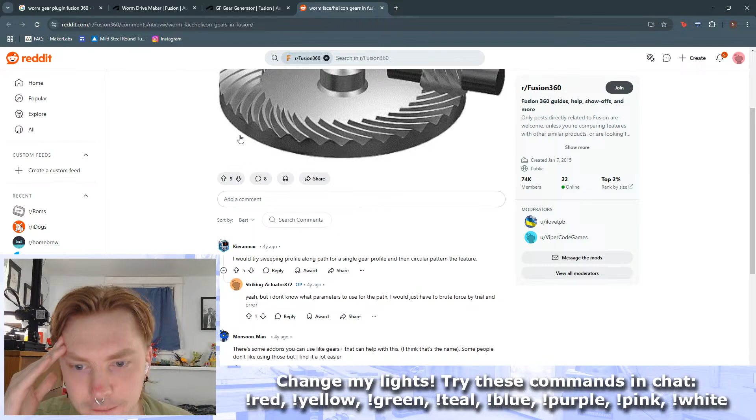So I think we are just gonna take a look. Worm gear plugin Fusion 360. So we've got Worm Drive Maker, $20 US. GF gear generator. Anything else? There's some add-ons you can use, like Gears Plus, that help with this. One of these might have it if you're looking for plugins or add-ons.

None of these can produce the face gear. I don't need a face gear, so that's fine. This might help. Let's see, GF gear generator. It's a minimalistic gear design application. Designs are made following the metric module DIN standard series. It's made for everyone. It includes 11 types of gears, 7 standard, 2 non-standard, and 2 experimental for every project you might want to implement them in. Spur gear, simple double helical, 90-degree bevel gears, gear rack, worm gear drive.

I guess this is what I want. So I think I don't even have to pay for a plugin. I was ready to pay. Money's not an issue, they call me Mr. Moneybags on the streets, but I'm not going to say no to a free plugin. I'm certainly not going to say no to a free one.

Is this? Let's see, okay, so this one, it's got 47 5-star reviews, which is pretty good. And those look pretty good. Let's see, let's just look at the other ones. All right, so helical gear generator.

Sorry, I'm getting a text. Getting a text from a friend of the channel. Let's see. Sorry, just reading some texts.

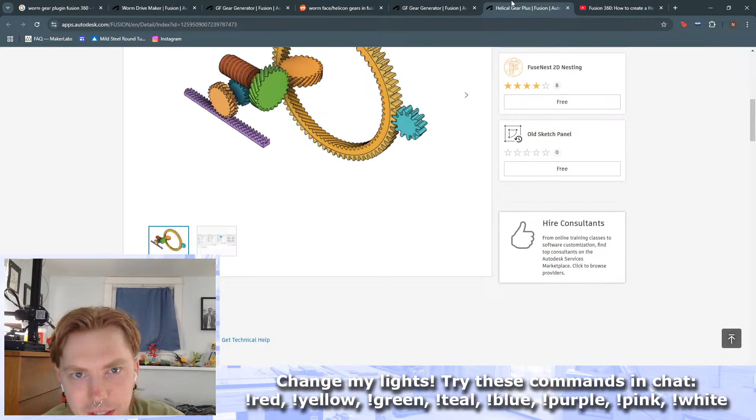This is not what I really want, I don't think. Helical gear plus. I think so. GF gear generator is looking pretty good.

Do I have audio? Wait, do I not have audio? Oh, I had audio a minute ago, no? Where did my audio go? One second. We are having technical difficulties. Give us just a second, chat. Why do I not have audio? Disconnect. Oh okay, and can I connect them back in? Will I hear anything? Hello, hello.

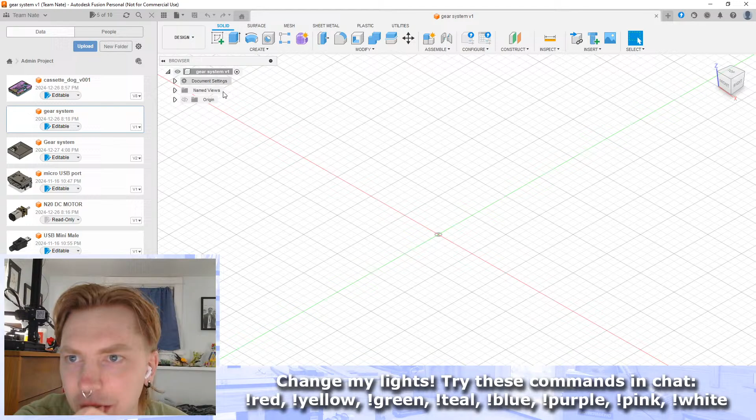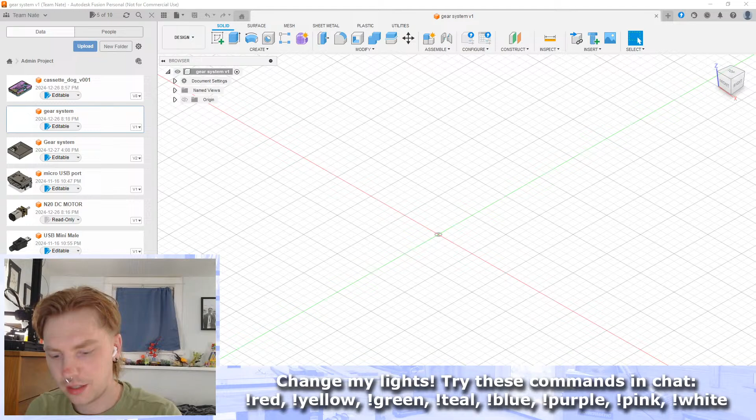Let's open gear system. And how do I use the plugin that I just installed? Extensions? No. How to use Fusion 360 add-ons.

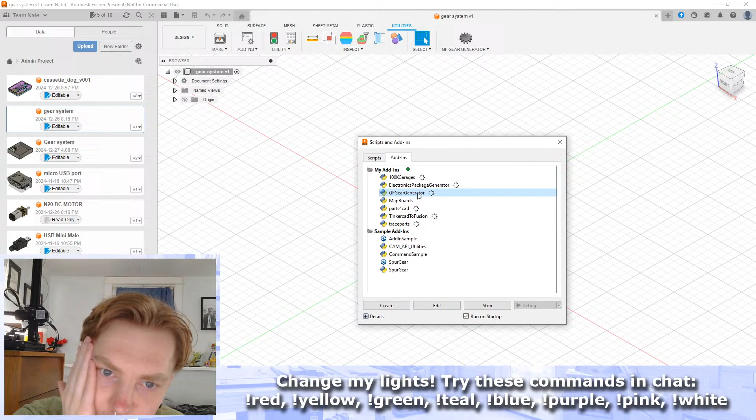We ran the installer. Once installed, the add-on or script appears in the scripts and add-ins dialog box, which is utilities, add-ins, scripts and add-ins. So, add-ins, GF gear generator. Okay. And how do I... Oh okay, right here.

We've got worm gear drive, helical. Yeah, helical sounds right. Helical sounds right. Sure, that. This helical gear.

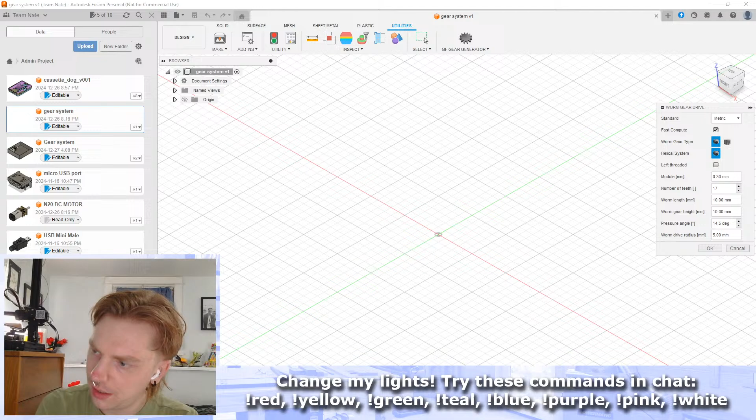All right, so to get this worm gear to mesh with the spur gears that I want to create, the module of both has to be the same. So this needs to be the same between this worm gear and the spur gear. The pressure angle needs to match also. I see. And I guess that's it.

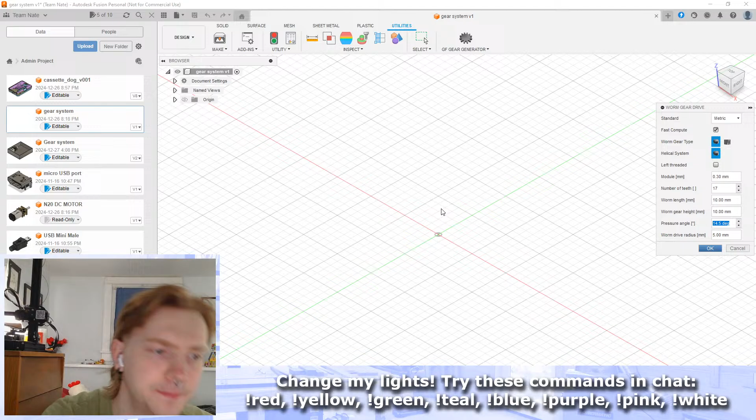Okay, let's just create this default worm gear. Ah, I made two. Oh, it generated that automatically. Wait. Huh, that's cool.

I see, I see. Let's match the teeth. Let's try and match some of this to the stuff that's on iDog, and let's bring in the N20 DC motor as well.

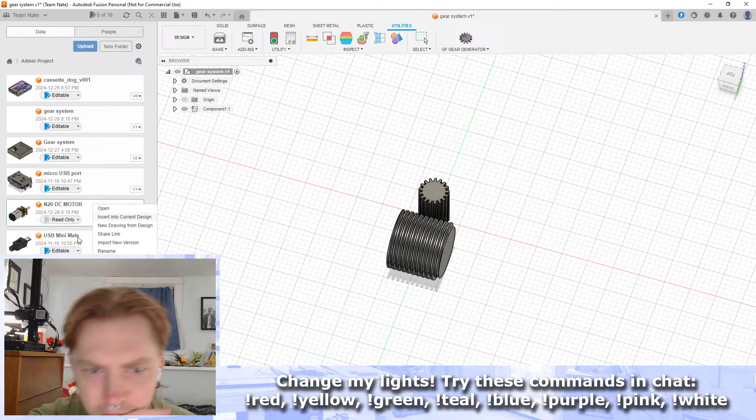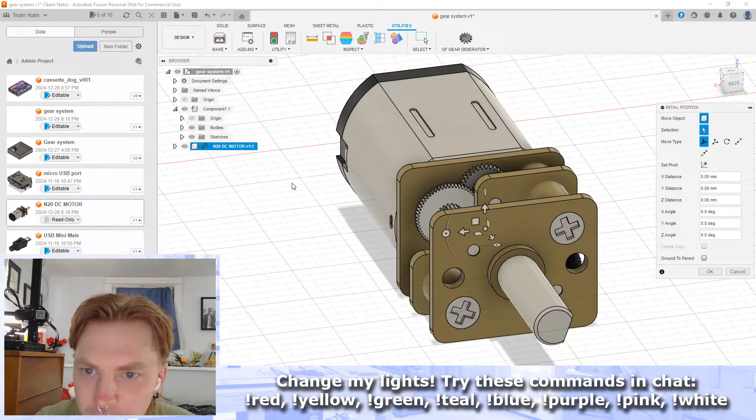Where did the DC motor go? Is it here? Where did that go? Okay, so we got the N20 motor, and then we want the worm drive to attach to the end of the N20 motor.

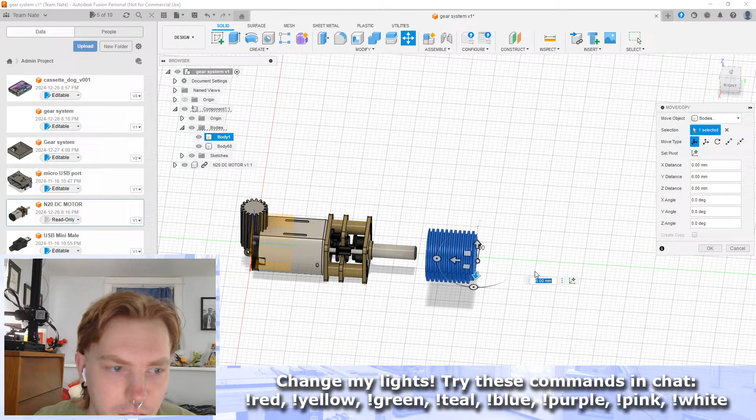So bodies, we want... Oh my, okay, so let's take this. We'll move it like so, like so. So I think we'll make it a little bit longer and a little bit less wide if we can.

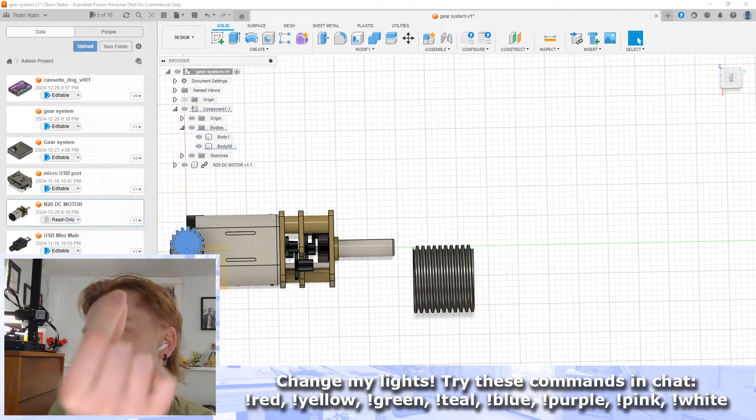And then as far as how many teeth are on the spur, let's match that. Yeah, I might as well match that to how many teeth are on the one on iDog. That is okay. I've already torn apart the iDog, so I have the gears and stuff I'm trying to mimic. I'm not trying to recreate this one-to-one, but I might as well try to make it at least similar.

So let's see, how many teeth does this thing have? 1, 2, 3, 4, 5, 6, 7, 8, 9, 10, 11, 12. Let's say like 24 teeth.

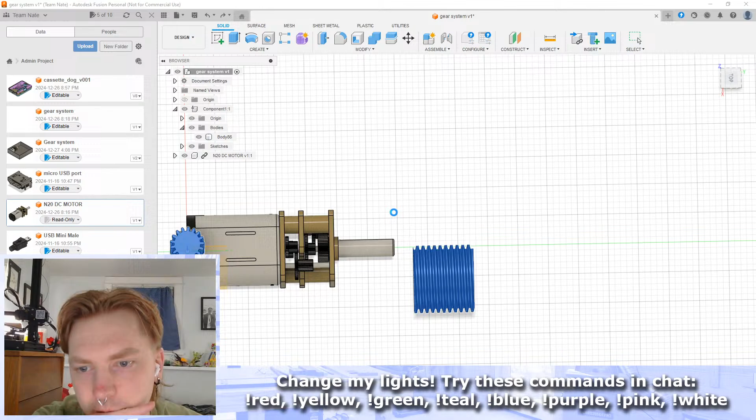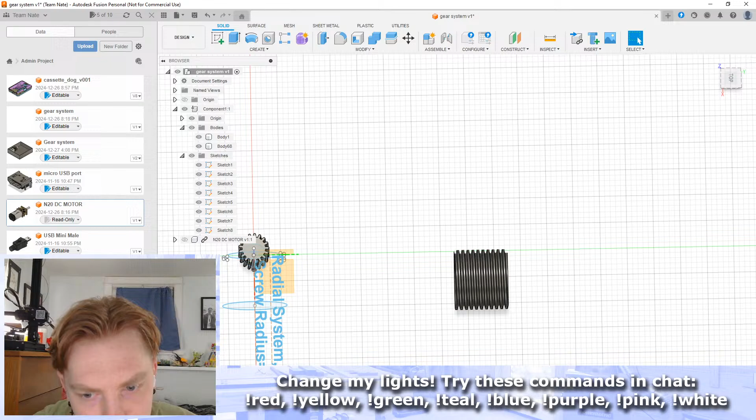Oh, let's undo that. Can I remove both of these? No, that just makes it freak out. Let's... Can we just delete all of that? Okay, let us make another one. I guess we're just going to keep trial and erroring it until it looks about right.

Worm gear drive. So the worm length, we said we wanted to be a little bit longer, let's say 15 millimeters. And we said we wanted it to be a little less wide, so let's say 7.5 millimeters. We want the teeth, let's say 24 teeth.

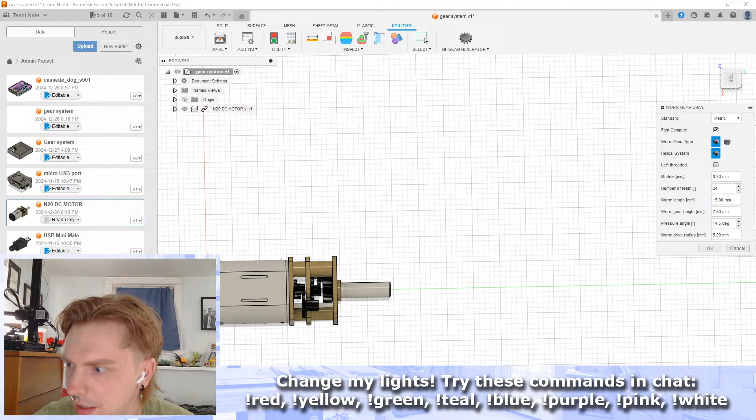Module. What is the module of a gear? We all learned something today. What is the module of a gear? Defines the size of the teeth and relates the pitch diameter of the gear to its number of teeth. I see, so that's going to decide basically the diameter. It's like the relationship between the diameter and the number of teeth.

Let's just say that's... Wait, what's the difference between worm gear height and worm drive radius? I don't know, let's just attempt this and see what we get.

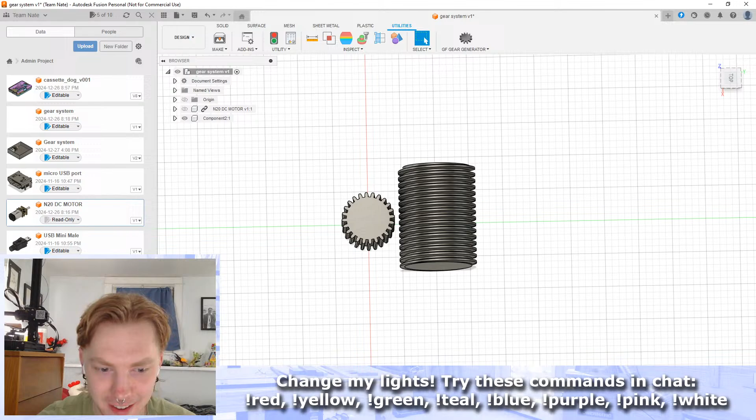We're doing a lot of this based on vibes, chat. This is not a hard and fast science that we're doing today. But I think I want the worm drive to have less, because this is getting 3D printed, and I don't want to have all of these helixes. I want fewer of these helixes. I'm trying to think of what parameter is affecting how many of these spirals we get. I want to just go wow wow wow instead of wow wow wow wow wow wow wow wow wow, you know.

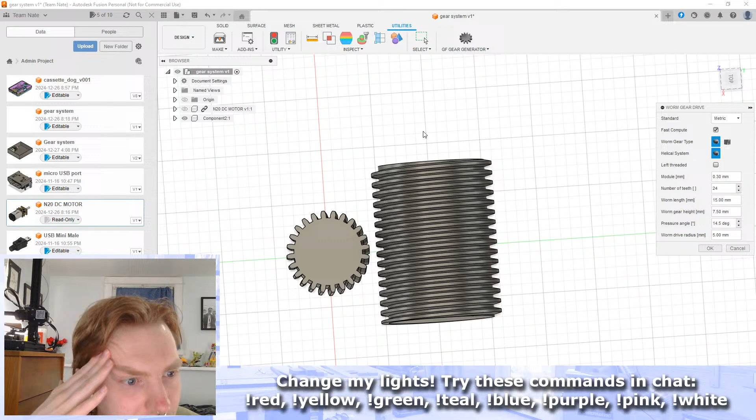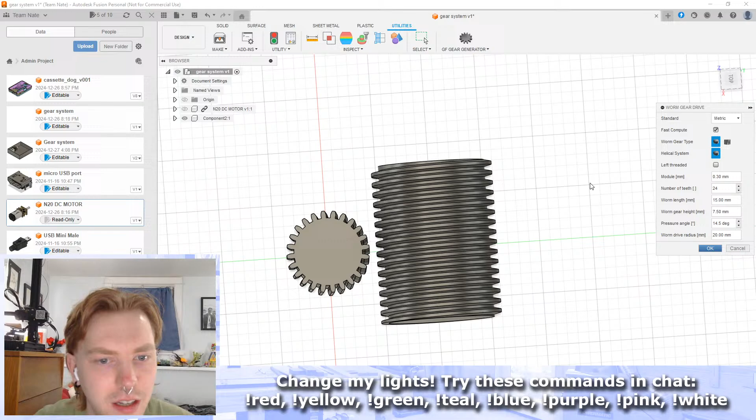Let's try. What if... yeah, we're just going to trial and error this. Worm drive radius, instead of 5, let's make it like 20. Oh, all right, well I guess that answers that.

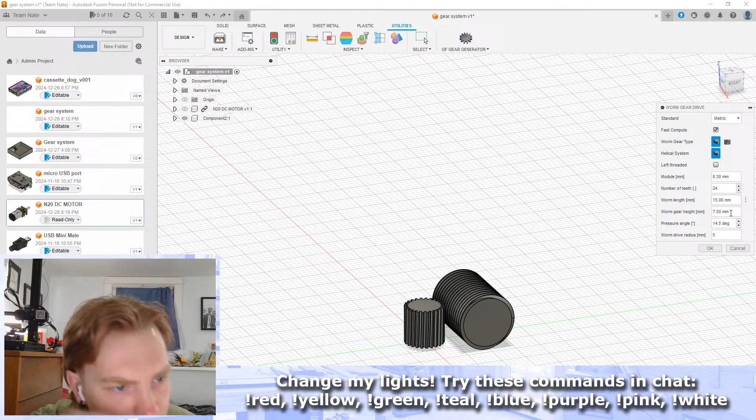Let's change that back to 5. Then what does worm gear height do? What if I change this to 75? So that changes this. Okay, so that's fine. Let's change this back to 7.5.

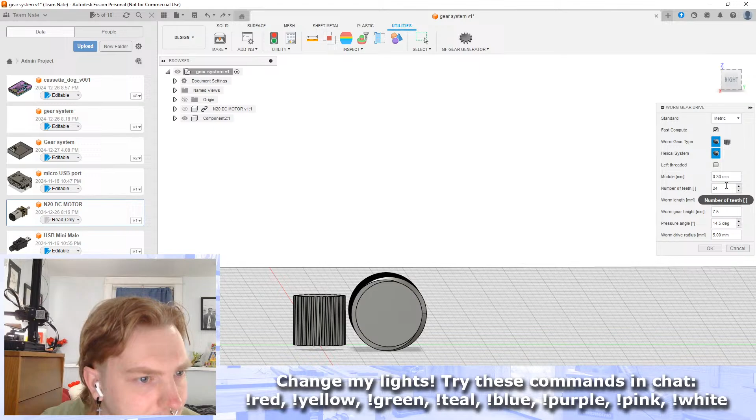Module. Let's change module to like 0. Let's triple it and see what that does. That, okay, that's closer. Yeah, because I wanted this worm gear to have way less spirals. So we're getting closer to what I want, for sure.

Let's delete that. Yeah, so I wanted this spiral. This seems good here, but now this gear is a little bit bigger than I'd like, and I understand it has to be... how does this work? I like this, but I dislike how big this is.

Worm gear drive, maybe pressure angle has something to do with it. What if... well, does that make sense? I know that reducing the number of teeth on the spur gear will make it smaller, obviously, but somehow the one in the iDog has a relatively small number of, well, I think it has a little more.

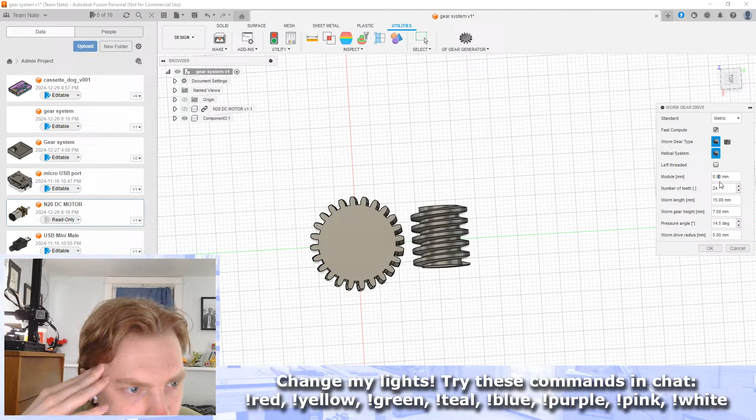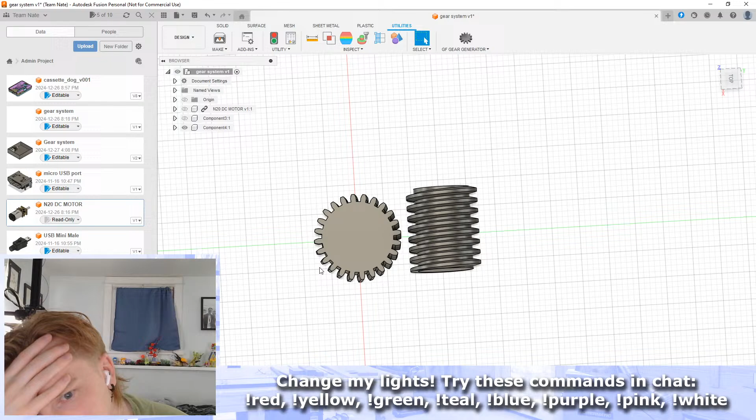We can change the module to be, let's say 0, because we tripled it last time. What about 0.6? Okay, that's pretty close to good. Maybe let's change it a little more.

Worm gear drive, let's say 0.75, and number of teeth, reduce it down to like 20. I think that'll be good, at least for a test. It's something I can't get too worked up about, I guess, getting the gears right. There's no exact science, this is just vibes. I mean, there probably is an exact science, I just don't know it. I think this will work for what we want today.

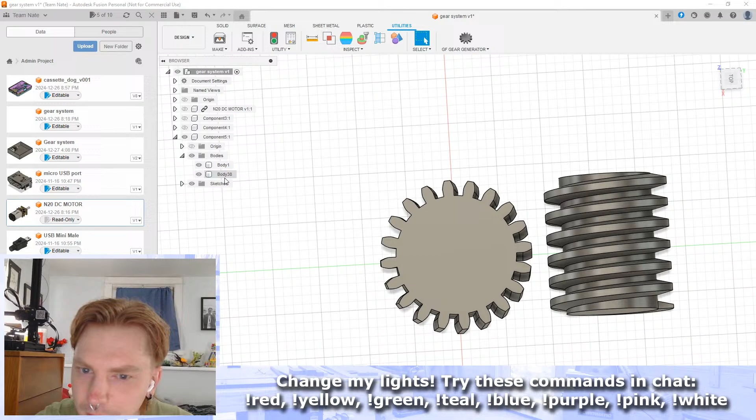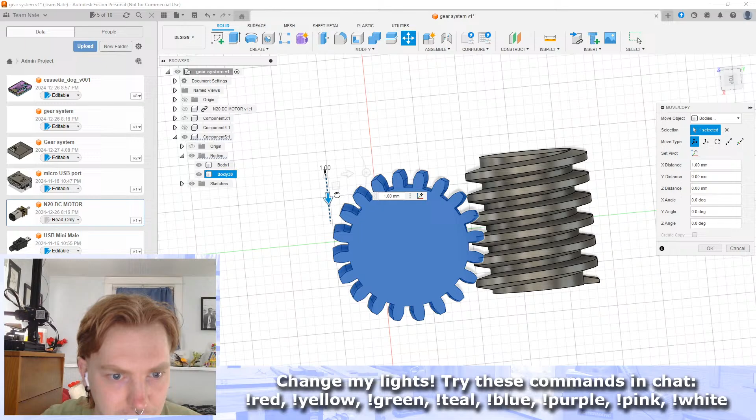I think we can just say that's good, we can call that good. And then if I were to move this gear, I think this gear generator is designed to mesh this spur gear to this worm gear, even if someone really stupid is doing it. So I think that's perfect, pretty perfectly.

There is definitely a precise calculation to place these so that it doesn't act crazy, but I think we can just do some vibes. Some little vibes never hurt anybody. I want to move that, 0.25 millimeters?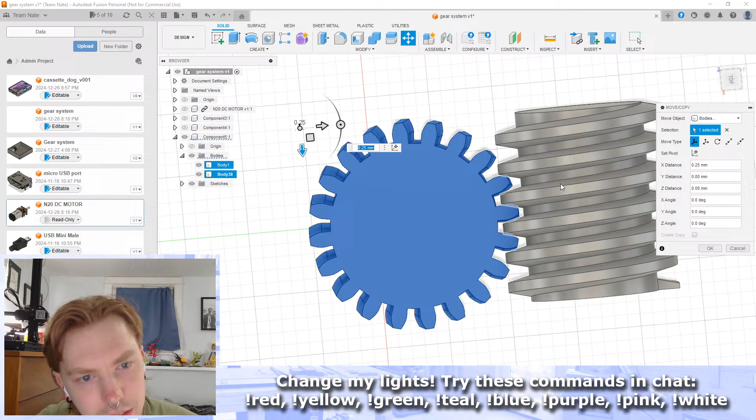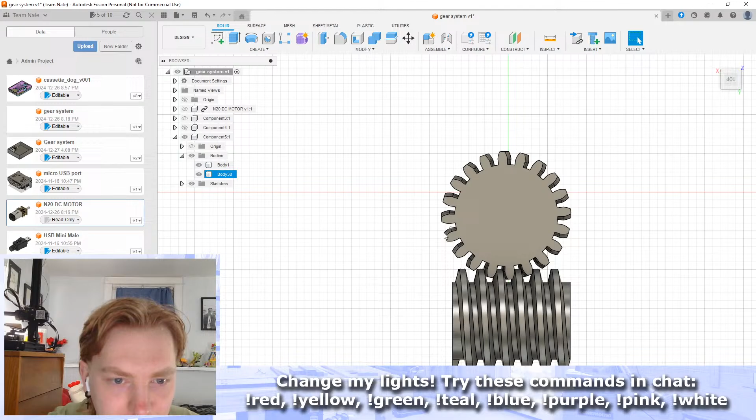Does that look about right, chat? That looks good. Yeah, you know what, we can't let perfect be the enemy of good. I think this is good for today. Someone who is actually smart with CAD can tell me how wrong I'm doing things on another day. But that looks good, that's something.

That is something. I guess, can I just take... did I already delete? No, we'll delete. Don't need this. Delete, don't need this. Okay.

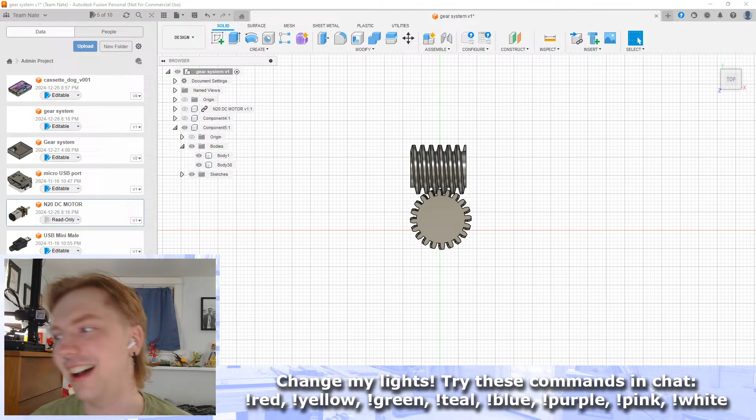See, a problem with the stream from yesterday, a very successful stream by the way, it went pretty well. I usually don't have OBS open to actually look at what I'm doing because I get distracted by the little picture of me on the side. But a lot of my footage from yesterday just looked like this, just a forehead or just an ear. I'm very bad at staying visible on camera. I do a lot of this, which is okay, but not ideal, dare I say.

Let's take both of these and rotate it. Let's rotate this whole thing. Yeah, that's what I would like to do. And then, yeah, sure, sure.

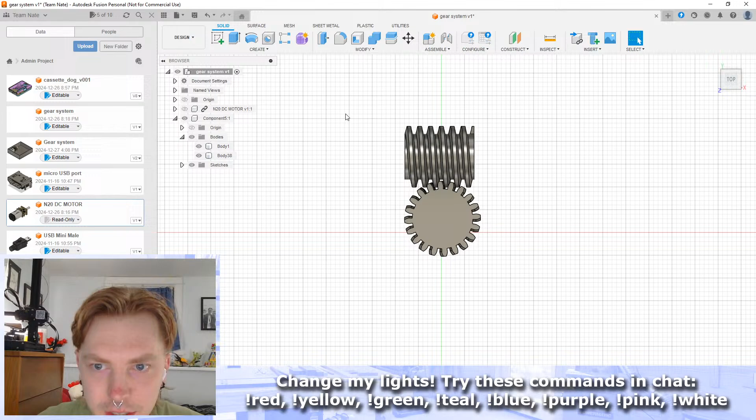Wait, what happened here? What happened here? Sorry, I'm gonna undo some things. I want to delete this. Delete both group and contents. Yes, okay. And then I want to...

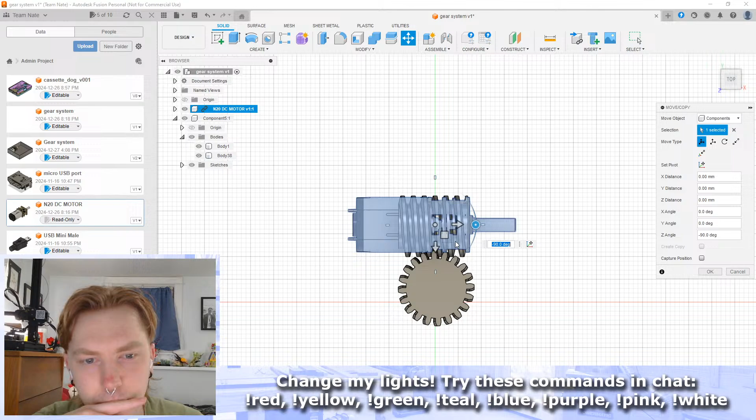Let's take the N20 motor, move it, well, we'll just rotate it 90, and then we can just move it like that. That should be good.

Okay, move the worm gear system, move it, rotate this 180, move this like so. And I want, let's not attach it to the motor just yet. Can I find the center of the worm gear? That's pretty important.

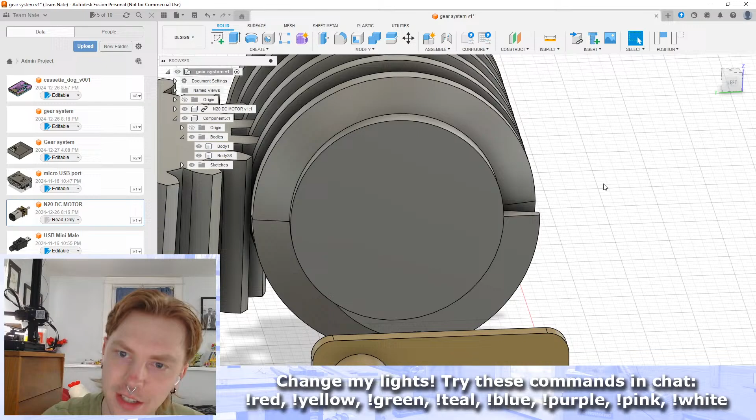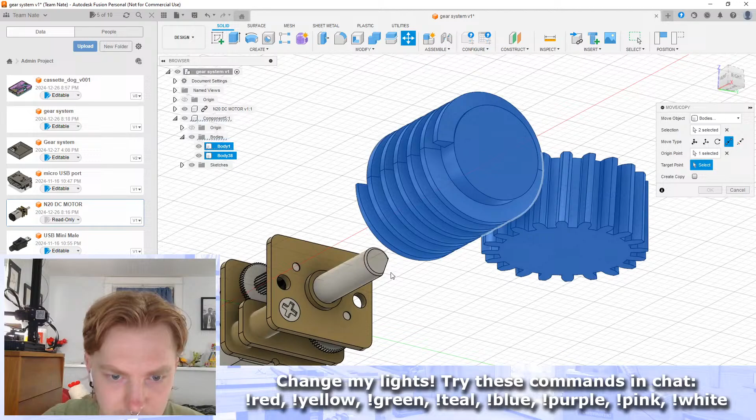Is it smart enough? Can I select both of these, click move? I want to do point to point. That looks like a center. And target point, we'll do the center of this. Some component positions have changed. Do you want to capture the current position of moved components? Revert? Oh, nope, that's not what I wanted.

Let's try that again, let us try that one more time. We're going to select both of these, we're going to move, we want point to point. Origin point, we want the center of the worm drive. Target point, we want the center of the output shaft, well which one? Which one? Which one's the center? Oh no, wait what? Oh.

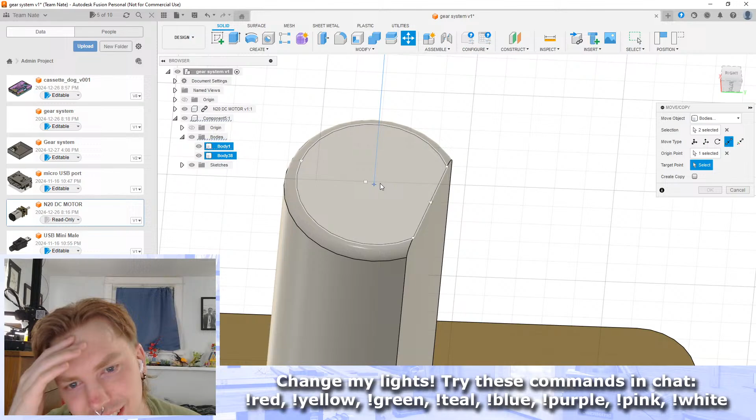Chat. Oh no, this is... I feel like I'm in goddamn Squid Game right now. I don't know which one is the center. Shall we just take a chance? Just take a risk?

We're asking ChatGPT for sure. We're asking ChatGPT.

Is the little cross the center of the output shaft, or is it the square? The cross typically represents the center point of a feature like a shaft. The square, on the other hand, often represents a vertex or a specific point on the sketch.

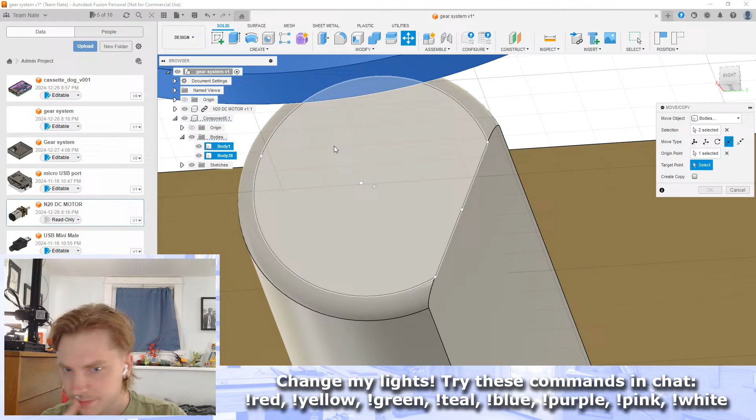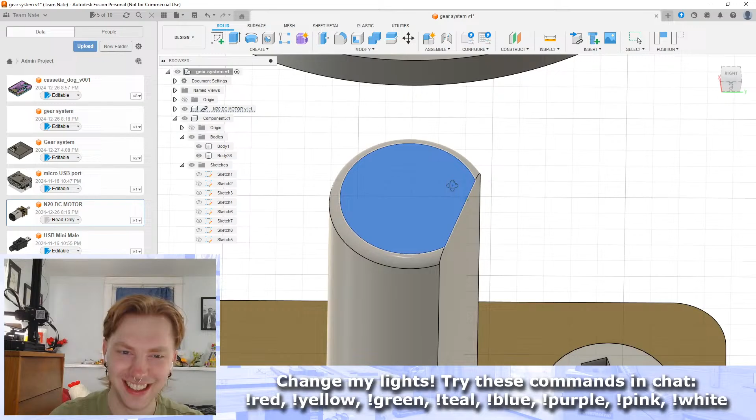Wait, I'm gonna hit cancel for a second. I'm sweating. What do I... I guess I can probably wait, chat. Okay, I know what to do. I was not acting very smart.

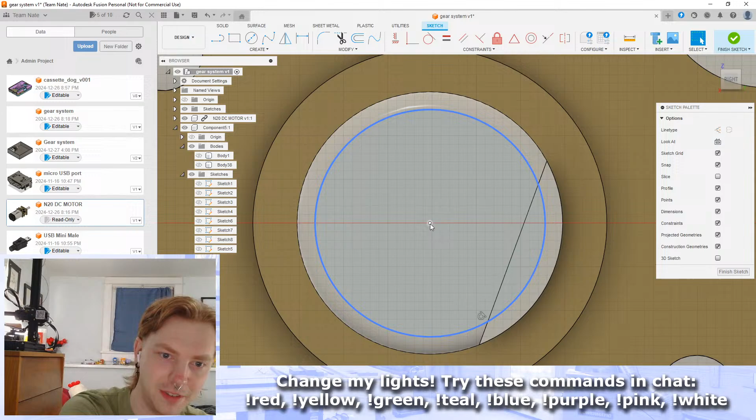I'm gonna create a sketch here, and we're gonna find capture position. If I make just a circle... no, here's what we're gonna do. I'm gonna create a 2-point circle, and go like that. Okay. And that's the center point, that's the center point of the circle. I'm gonna just create some lines going off it.

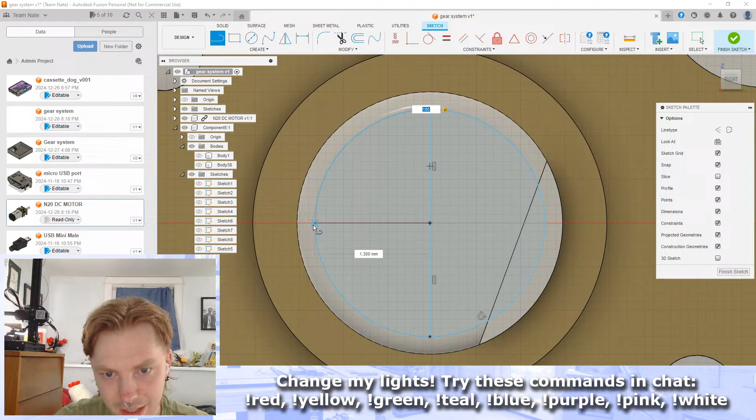90. I want to be damn certain that I am putting the worm gear in the center of the shaft, or else nothing will really work, and that would be very sad. I say this a lot: I am not a CAD master. I wouldn't even call myself CAD intermediate, I am a CAD baby. But I think I'm just able to... I'm an expert at trial and error, is what I will say.

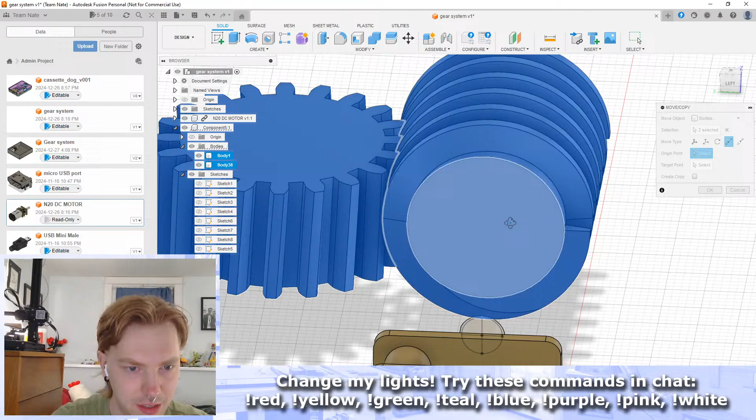I'm gonna move point to point. I don't even know, I'm not even confident if this is the... oh, you know what, we are gonna do chat. I'm gonna do the same thing on this. It's really important that the center of the output shaft of the motor is going into the center of the worm gear, so we're gonna spend some time to make sure that's the case.

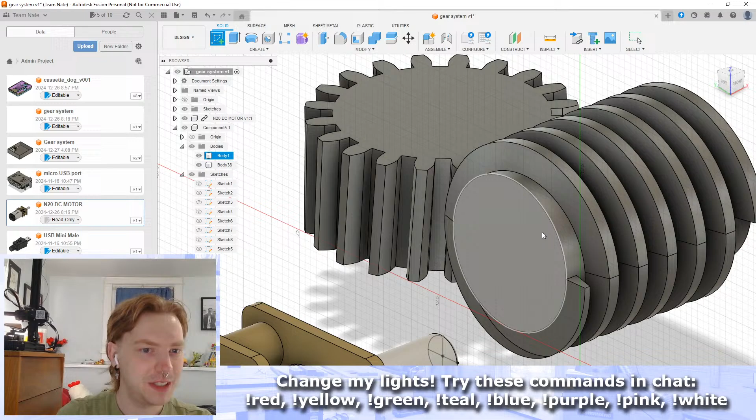This is such an easy task, but it's like it's Herculean, just because I am a little bit stupid. But we're gonna make this happen. We're gonna get 2-point circle, attach the top. That's good.

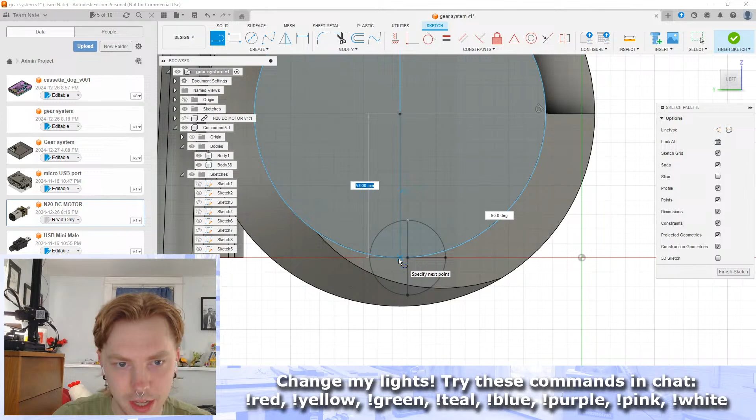90. Yeah, on my life, the center of the shaft is going into the center of the worm, on my life, if it's the last thing I do on this mortal coil. Okay. Yeah, finish sketch. Okay.

Chat. If this doesn't work, I don't know what I'm gonna do. I'm just gonna start breaking things. That's not true.

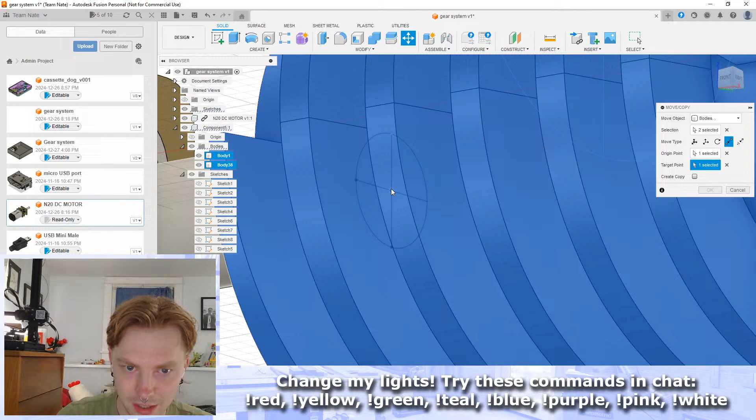Center, yes, 2, center. Oh yeah, okay, that has to be good, that has to be good. We are gonna click, okay.

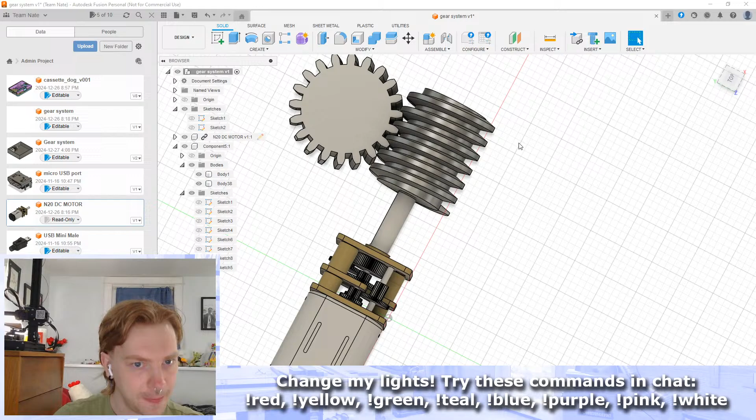Where are these sketches hiding, by the way? Why do I have multiple sketches folders? We're not going to worry about that. Then what we are going to do, I'm going to project. I want to project the output shaft of the motor onto the surface of the worm gear, so that I can make a hole in the worm gear so that I can fit on the shaft. That is the plan.

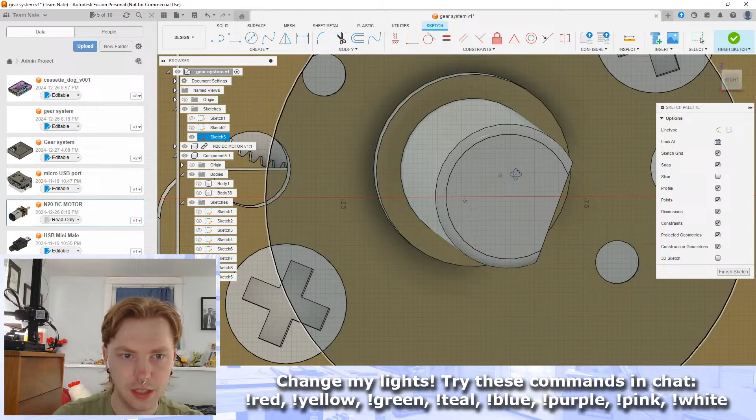So I guess I want to create a sketch on this surface. I'm going to hide these bodies for now. I want to project, create, project, include project. I'm going to project.

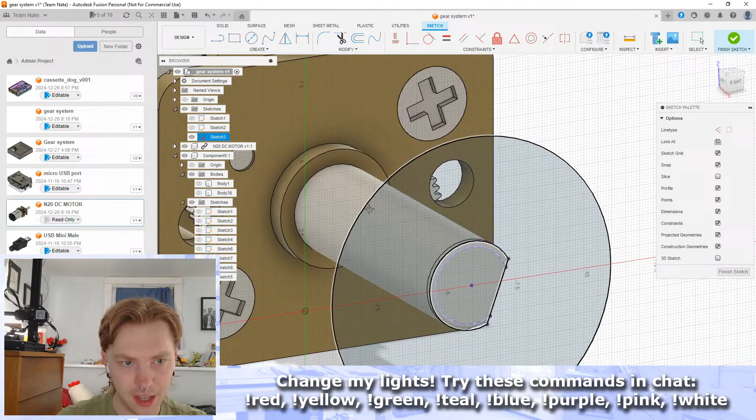Yes, okay, then I think we can just finish that sketch. And I will make the gears visible again. I'll hide the motor for now.

Actually no, we're gonna edit the sketch further. We're going to, is O a hotkey? Offset? We're gonna offset, no.

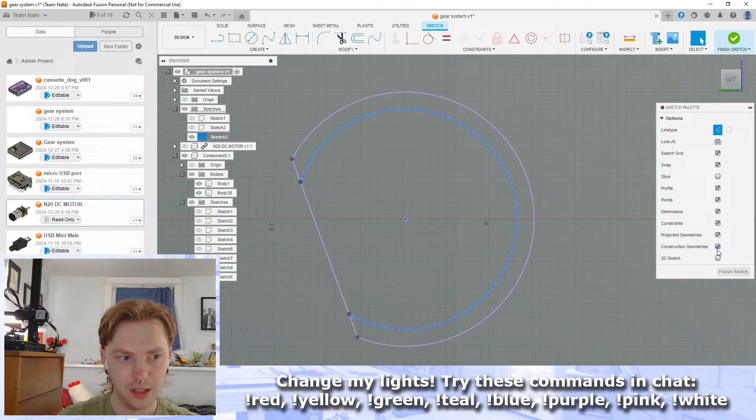I'm going to make this a construction line. And then, if I click, is that fine? Can I make all of that construction? Maybe that's because I want to offset, oh okay, I want to offset that. I'm going to offset that.

Because in real life, a 1 millimeter peg can't fit into a 1 millimeter hole. You need the hole to be a little bit bigger than the shaft in order for things to actually work, because real life is not perfect. You need tolerances and things — yes, that is an engineering term.

So I want to offset. What, a 1 millimeter offset, is that huge? How small is this? That doesn't make sense. Does that make sense? That's crazy, right? Wait, how small is this? This doesn't make sense to me. Whatever, I guess it makes sense.

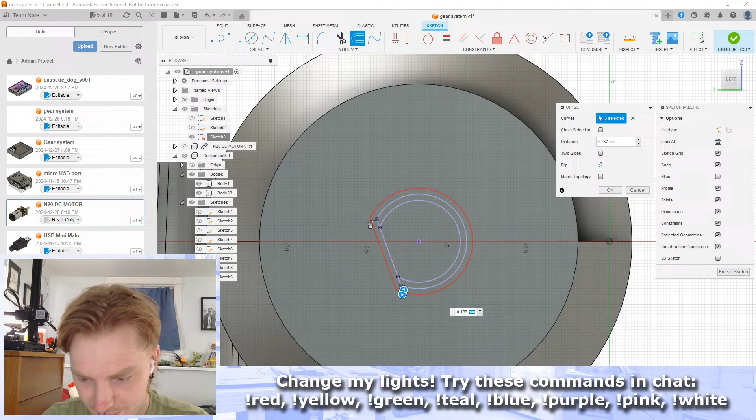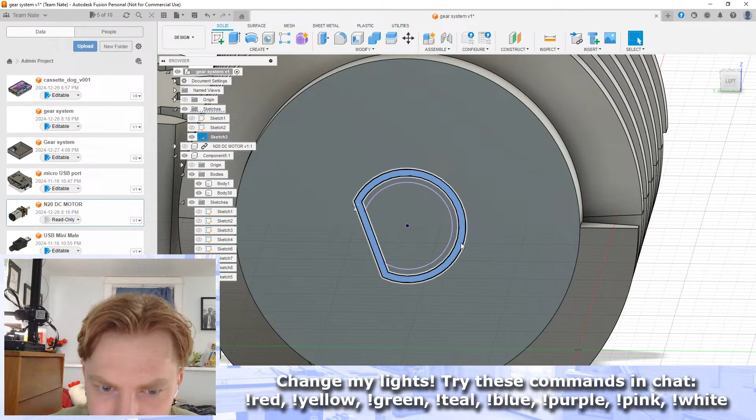I guess these motors can be pretty small. I guess we'll make it a 0.2 millimeter offset. How small is this stuff? We're gonna worry about that in a minute. But I can select all of these, and I'm just going to extrude all the way through like that.

Yeah, but now I'm curious how small this stuff is. Is this scaled correctly? If I just create a sketch here, how big is this motor? Like 2.5 centimeters long? N20 motor dimensions. Is that right?

Is this thing really tiny? 3 millimeters by 9 millimeters. Product dimensions 4 by 2 by 2. Is that right? If I include just everything, is that like 4? I guess that's about right.

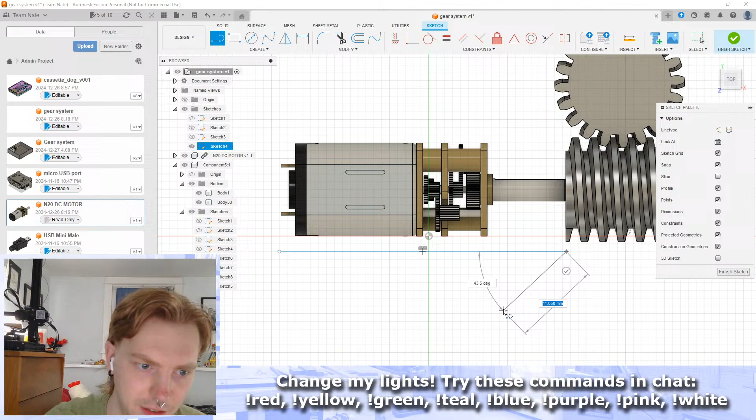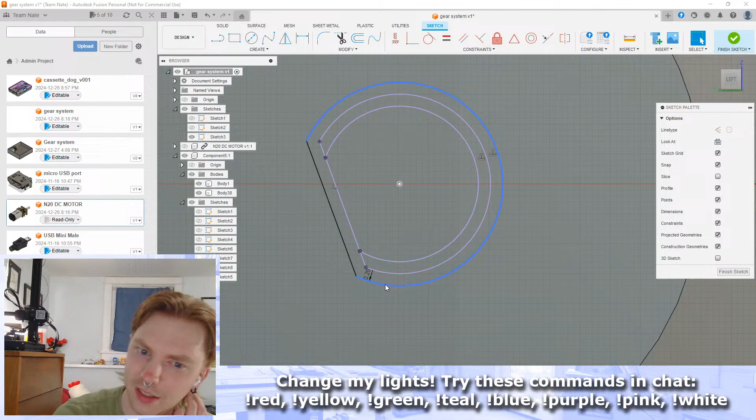Okay, this stuff is just really tiny, but I think that tracks. Maybe I should have made that offset even a little bit bigger, just because when we're 3D printing, my 3D printer at least is not super precise. It seems like a really big offset, but this stuff is so small that I think we're going to need a big offset to get stuff to actually work together.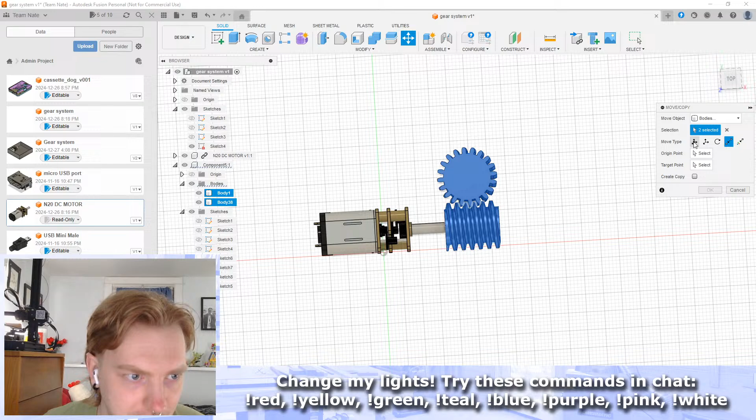I think that's fine, yeah, we'll say that's fine. Let's, you know what, let's try it, let's just try it. And anything — even if everything doesn't really work today, we're certainly closer to something that does work. And that's really exciting, I think.

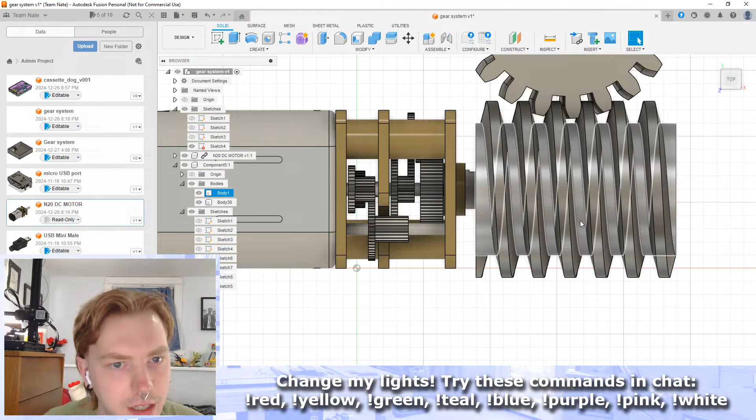Nine is a bit far. Yeah, let's just keep it like that. Click OK. Yeah, okay, so this is what we want, and then we probably want...

It's interesting that these have like a little bit of a slant, these spur gears. I wonder — I mean it's a pretty minor slant. I think I can probably just copy this gear.

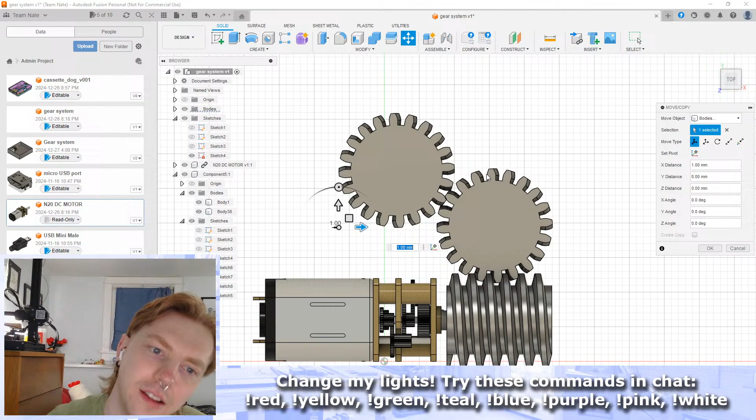Want it to have a little bit of something. I suspect, do I need — it doesn't look like these are gonna play super nice with one another. What if I rotate it that? No, that doesn't look great either.

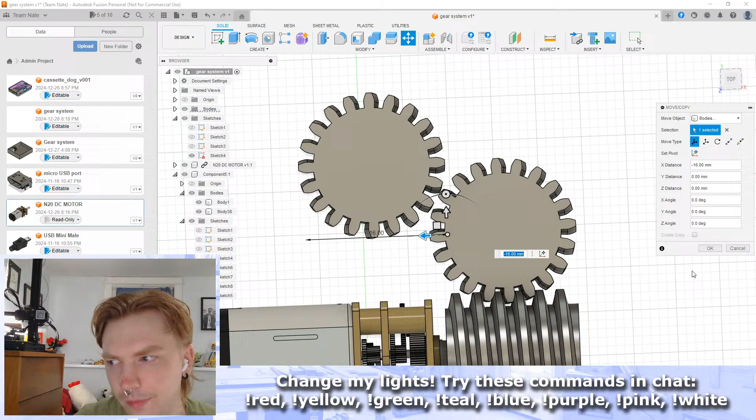We're getting somewhere with this, we definitely got somewhere. I guess what I'm trying to reckon with is that what the gear generator generated for us is this worm gear drive. These little teeth aren't straight up and down — the teeth are slanted, which I guess works nicely for the worm gear itself, because I think that just makes it mesh nicely here. But I'm scared with how that's going to make it mesh with other simple spur gears.

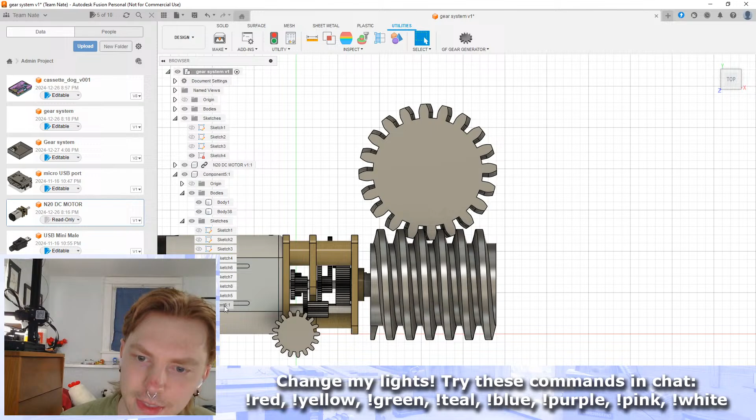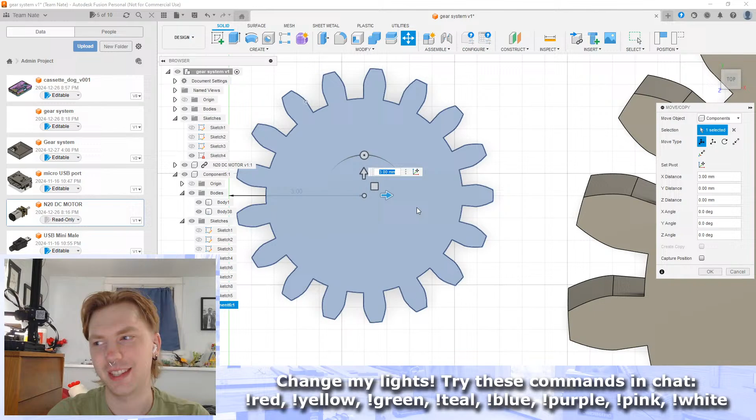So you can see a normal spur gear has all of these teeth straight up and down. I'm looking at a perfectly nice kind of 2D image, whereas here I'm seeing that these teeth are angled. But I just don't know, I'm scared with what that may cause downstream.

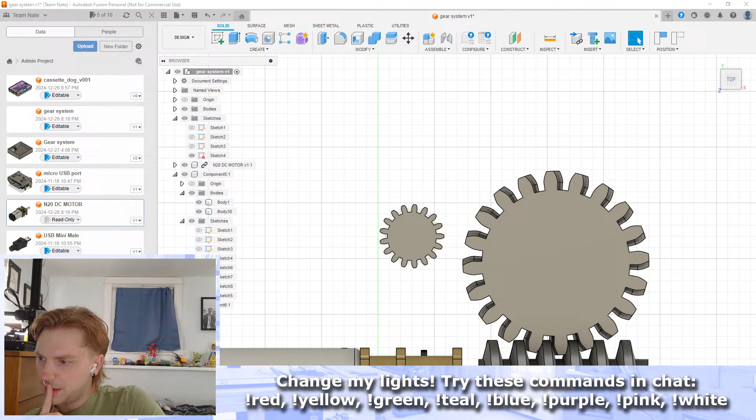Angled teeth on the spur gear are there for compatibility with the worm gear. These angled teeth are necessary to work with the worm drive, but that means this spur gear will mesh nicely with this, but it won't mesh nicely with something like this because these aren't angled. Even if they're both angled, there will be compatibility problems. But what we can do is stack two gears together like a cake.

We can have this. Let's open Photoshop. What we can do... alright, we undid as much as I don't need to undo. We have the technology.

Here's what we can do, and I think this is what's actually happening in iDog, and I didn't understand why. So our gearbox is going to have a motor, a shaft, and then a worm gear, and here's the angled spur gear. We want that spur gear to interact with some other spur gears.

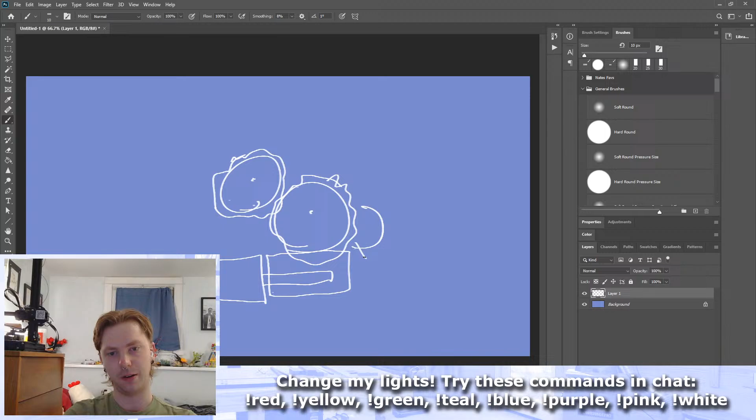Our gear cannot be both compatible with our worm gear and with this other gear. It just can't. But what we can do is utilize the third dimension, folks. So instead of looking at a top-down view of the gearbox, we're looking at a side view. We'll have a gear here,

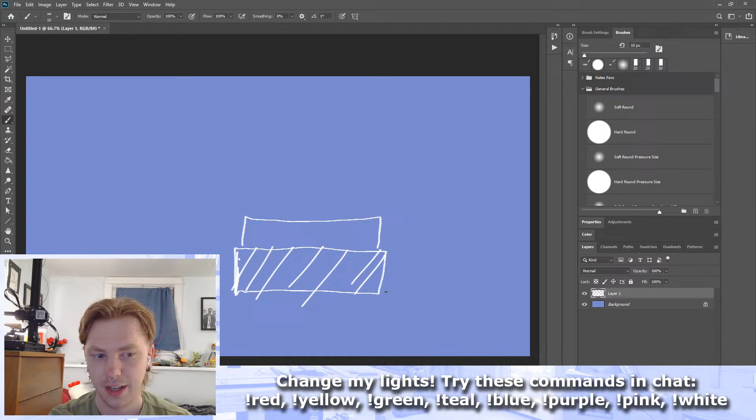and this has angled teeth like this, right? That's what we have in Fusion 360. It has angled teeth to work with the worm drive, which means it can't work with the other gears with straight teeth. But what we can do is, on top of that, have a second layer that can have straight teeth. Then our other spur gears don't even have to interact with this angled piece; we can just have them interact with this top layer of the cake.

Ooh, that was supposed to be straight. Straight, sure, straight. So we'll have the teeth at the bottom to interact with the worm gear, and then the straight teeth will interact with each other, and this will be able to go to output 1 for our head and output 2 for our ears.

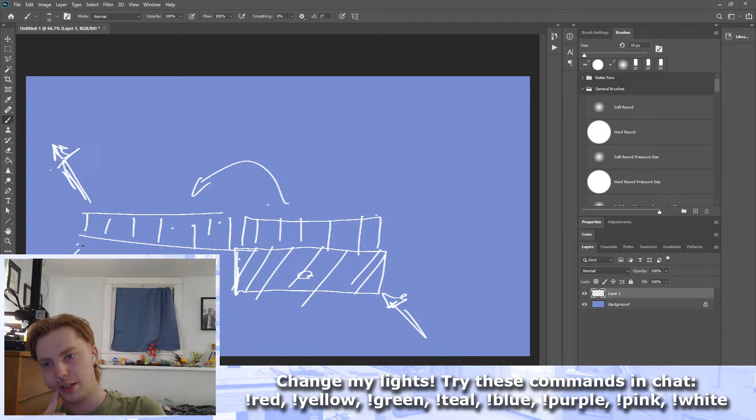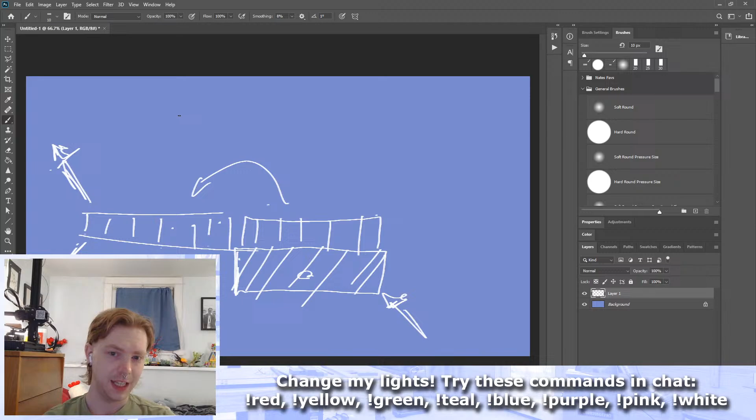We're pretty much reaching the end of our stream tonight because I have plans this evening. But we actually made some progress tonight, which is more than we can say about our last stream. We had a lot of fun last stream but didn't get a ton done. I didn't get a ton done tonight either, but we got stuff done.

We got the motor, and the motor is able to be inserted into this worm gear. This worm gear is able to mesh with this spur gear with angled teeth. Next we're going to get this to interact with other gears, and hopefully actually create the gearbox that's able to fit all of these.

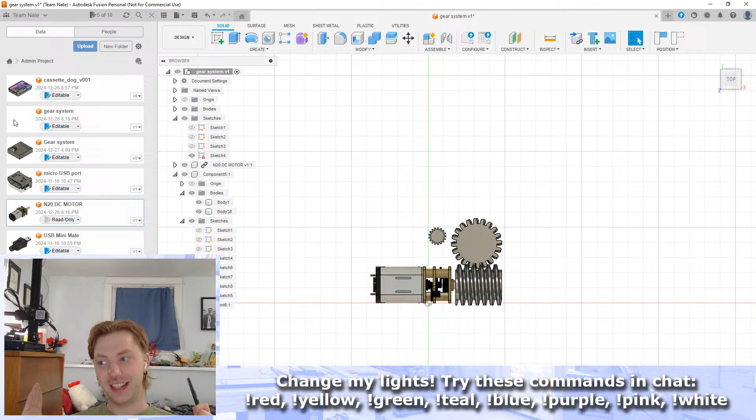But we made progress, and that's really cool. I'm happy that we're actually making some progress on this. Even if it's slow, a little bit day by day will get us to the finish line eventually, which I'm excited about.